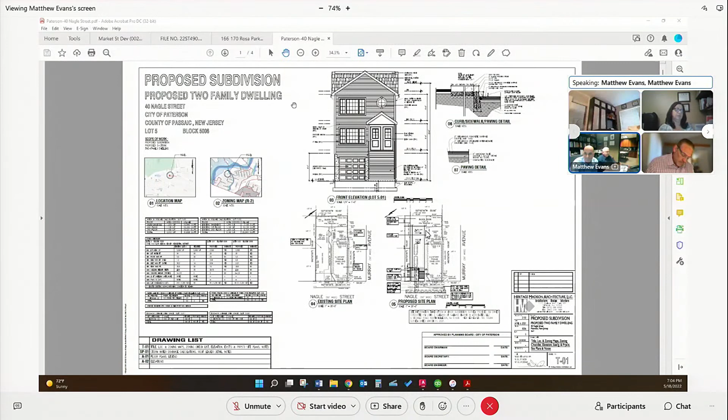Okay? Raise your right hand. Do you swear or affirm the testimony you're about to give is the truth, the whole truth, and nothing but the truth? Yes, I do. Say your full name for the record. Matthew Evans, architect planner, 470 Chamberlain Ave, Paterson, New Jersey. Thank you. We accept him as an expert witness. Please proceed. Thank you very much. Mr. Evans will post the Heritage Architecture site plan, which also incorporates the subdivision.

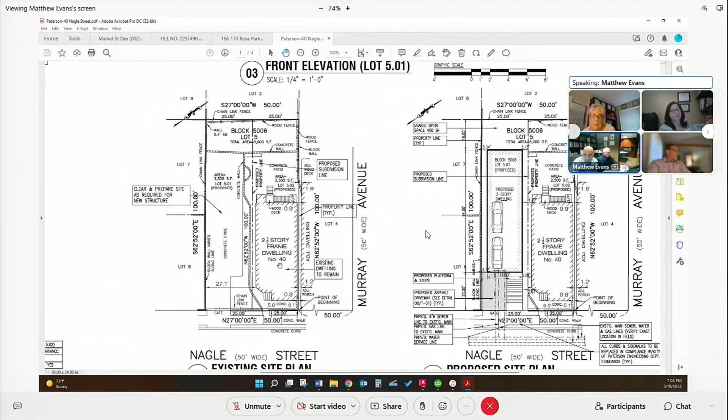Okay, so first we'll look at the existing site plan. It's a 50 by 100 lot, very standard throughout the city. We have an existing 2.5-story frame dwelling on the right side, or the north side, of the lot, and then we have basically a vacant area which is impervious and has a mix of walls and concrete and some parking there.

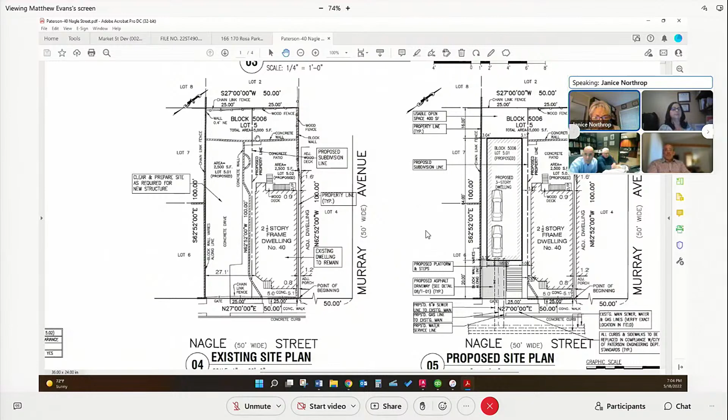What we're proposing is... I'm sorry, Mr. Evans, can you enlarge that a little bit? Is that better? A little bit more, if you could. Let me see what I can do. If you can't, just do what you can. I'll zoom in and I'll move around. There you go. Got it.

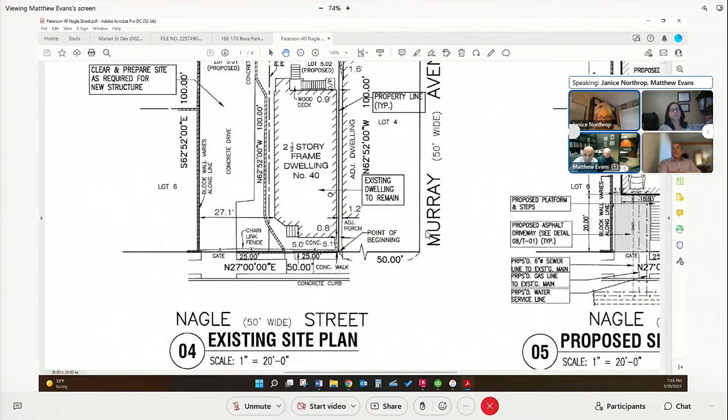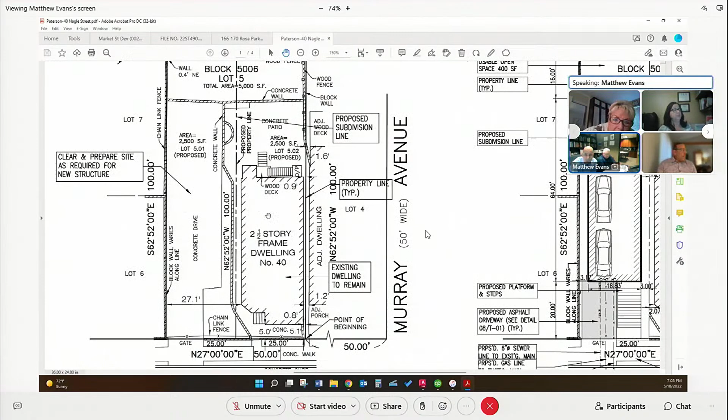Okay. Here you can see the existing site plan, Nagle Street, and we have a 50 by 100, and we're proposing to subdivide that into two 2,500 square foot parcels. These parcel sizes are consistent with the neighborhood and with the R2 zone, and they are scattered throughout this Stony Road section of Paterson and other areas. And as you can see, the existing house was built on the 2,500 parcel to the north, leaving the other one for future development, consistent with many of these buildings throughout the city.

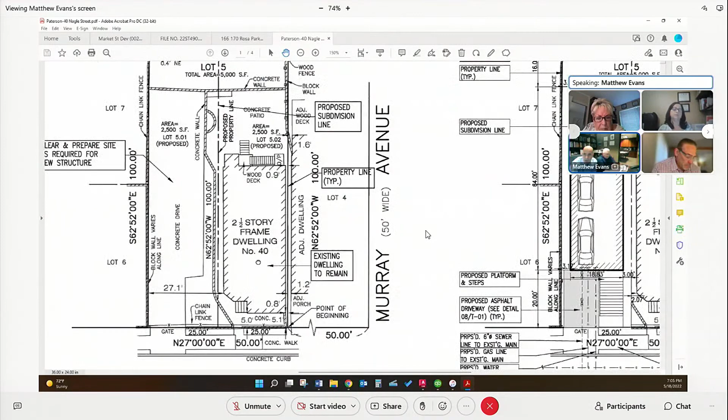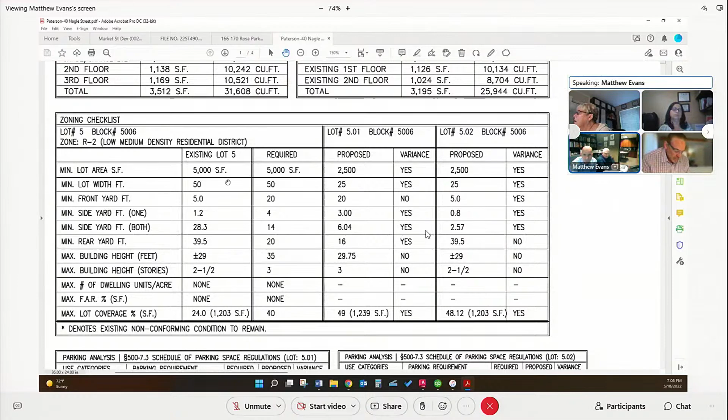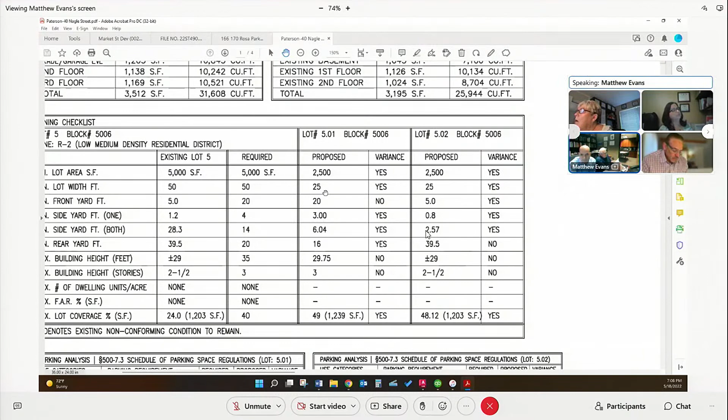So that is how we are proposing the subdivision. Going to the criteria, 5,000 square feet is required, and 50 feet of frontage is required, and we would be proposing 2,500 and 25 for each of those parcels. As far as the subdivision of the property, those would be the biggest variances that we would see.

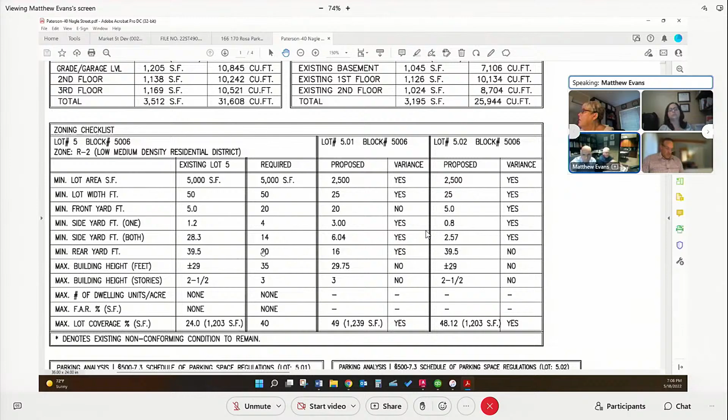The only variances, I guess, for as far as the subdivision. Right, and there's no change to the existing house, is that right? Correct. Right, okay. So you can, if you wish, proceed with any other highlights on the zoning chart. Okay, so that's basically what would be on the subdivision part of it.

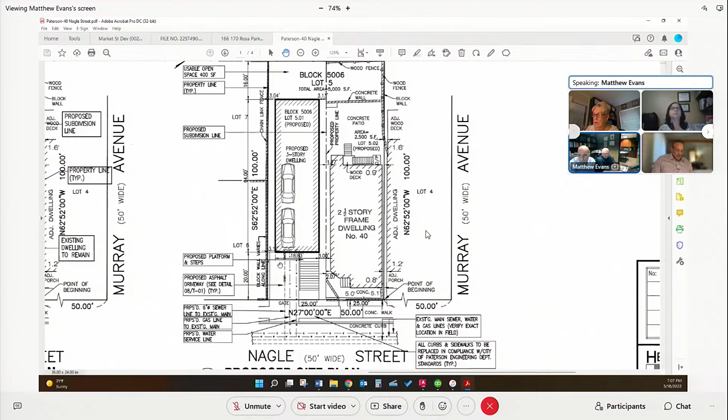Right. And then going to the site plan, we have a proposed 3-story dwelling with 2-car stack parking, and also circulation for vehicles getting in and out in the front of the property. We have a 20-foot setback consistent with the R2 zone, and then we have 16 feet setback in the rear. It's a little shy of 20 feet, but we do provide 400 square feet of open space.

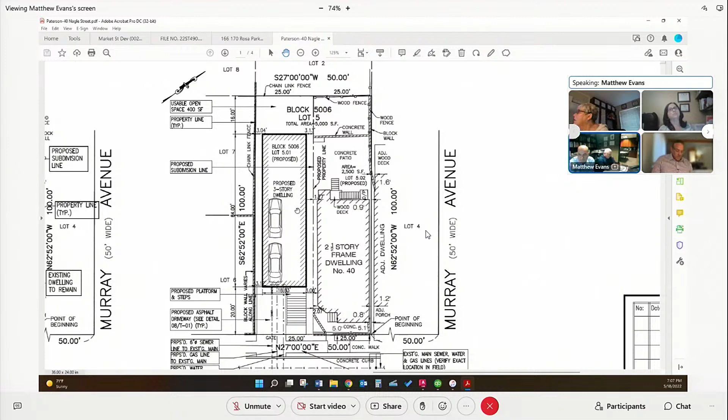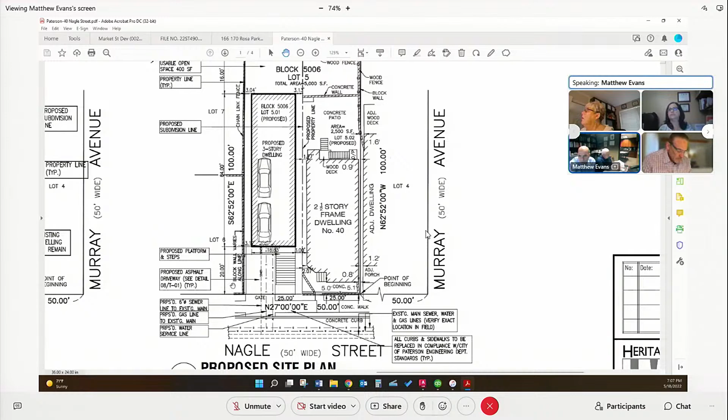The other thing is 3.13 on the north side, 3.04 on the south side of the building, and that would be consistent with many of these 2-family homes that have been proposed with the 2,500 square foot parcel. The curb cut would be to the south, consistent with the existing curb cut, but there would be all new curbs, sidewalks, and site improvements for proposed lot 5.01. Lot 5 would remain.

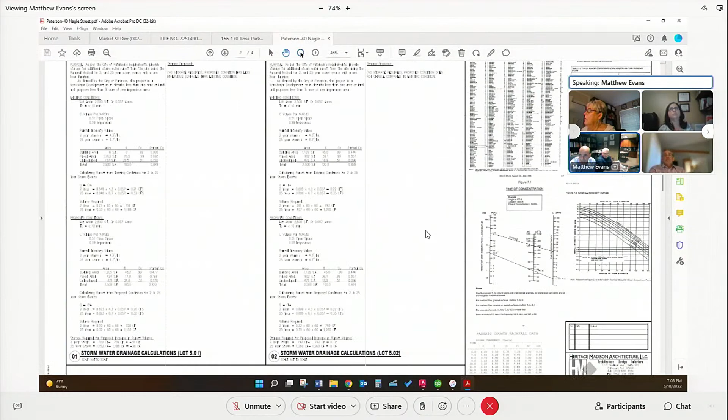Then going to the second page is basically drainage calculations and some engineering requirements. And then we have A1, which shows the floor plan, the ground floor, second floor, and third floor. Mr. Deutsch elaborated somewhat on the layout of these units and the floor plans.

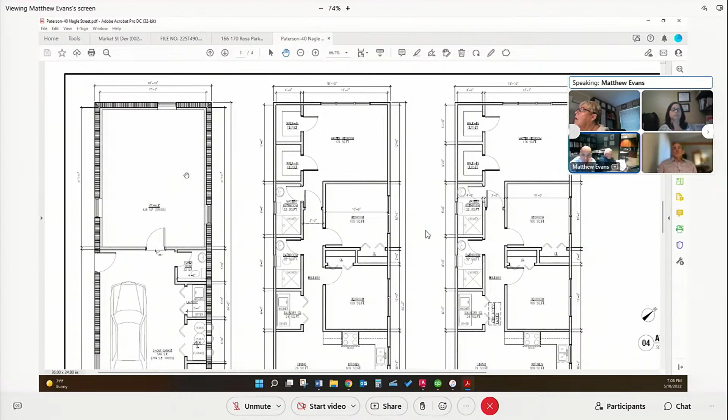And I would agree with Mr. Deutsch, we could divide that storage area so both tenants would have the ability to have storage on the ground floor level. So if this were to be approved, we would make an amended plan dividing that, basically 436 square feet would be 218 square feet of storage for each of the units.

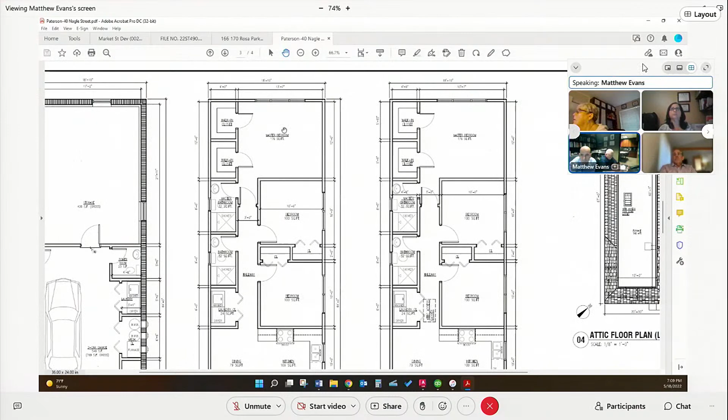The ground floor has the 2-car parking, powder room in the garage, and then laundry facilities, mechanical. And then there's a stair that accesses directly to the second floor unit. Second floor unit is 1,138 square feet. It meets the 1,100 square feet minimum for a 3-bedroom. It has 2 full baths. The master bedroom has 2 large walk-in closets.

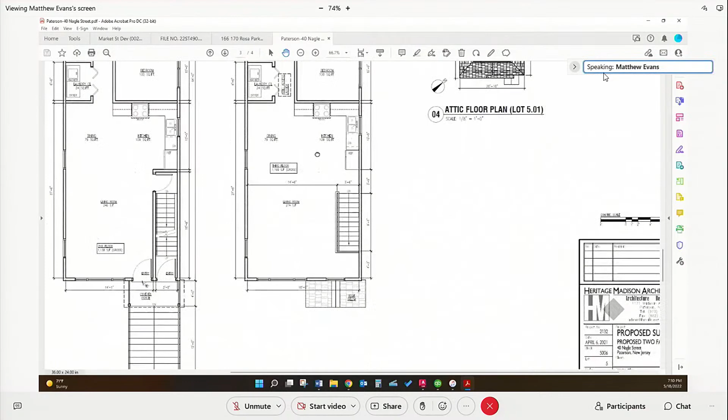And then we have 200 square foot bedrooms in addition to the main bedroom. We have a nice open floor plan for the living space, living, dining, and kitchen. That's all open living. And then there is another washer, dryer on that level. And then we have the top unit, and that unit is 1,169 square feet, and that shows a nice open floor plan with an open stairwell, consistent with the other one, a little bit more open than the lower unit. And then the rear is basically consistent with the other plan.

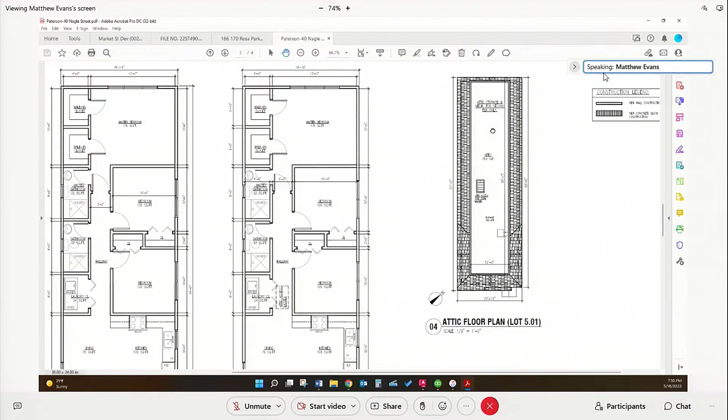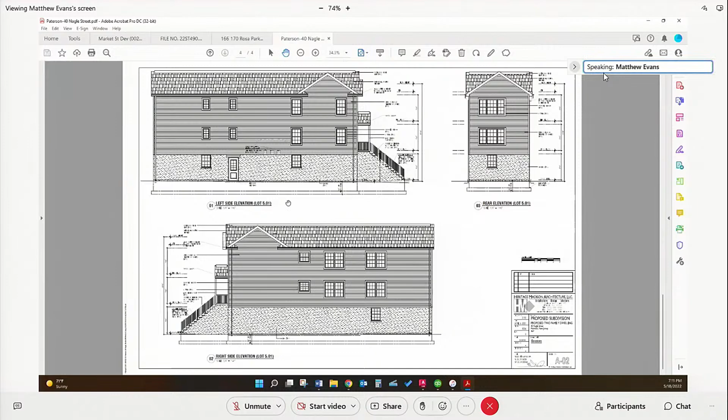Then there's a small attic plan which shows it's going to be just an unfinished plywood deck and a drop down stair that would access that for maintenance for the furnace and maybe some seasonal storage above. Looking at the last sheet, which is the elevations, we have the remainder of the elevations. We have the left side, the right side showing the stair going up to the main level to enter both apartments. And then we have siding, shingles, different materials to break up the side that way.

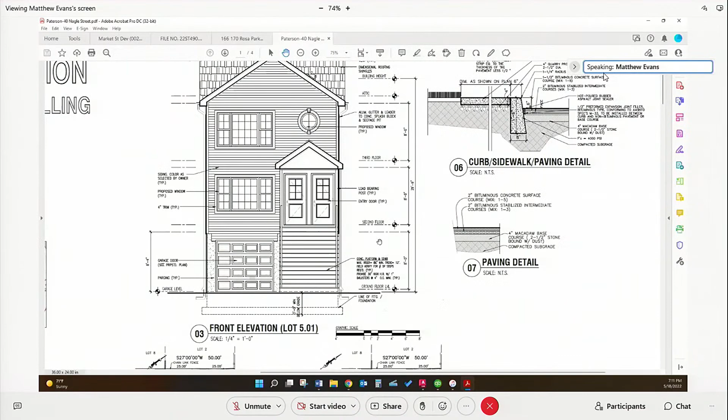So looking at the front page again, going to the front, we have a nice wide entry stair that enters to both apartments. And then there's a canopy over that protecting it with architectural windows and has a nice detail with a reverse gable on the roof, giving some aesthetic curb appeal. So that's basically the structure and the site plan.

Okay, Mr. Evans, just to follow up, Mr. Deutsch alluded to the fact that we are providing some very substantial open space area, even though it's not a requirement in the R2 for this type of development. Correct. So, again, both lots are going to be afforded either 400 or 984 square feet of open space, which provides the residents with that access for air and light, so to speak. Yeah, correct? Passive recreation in the back.

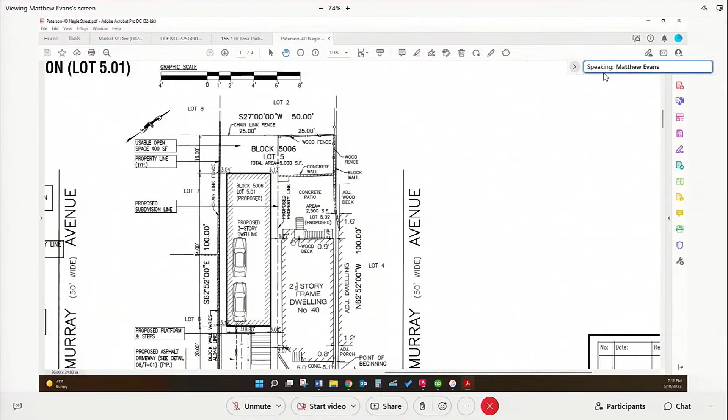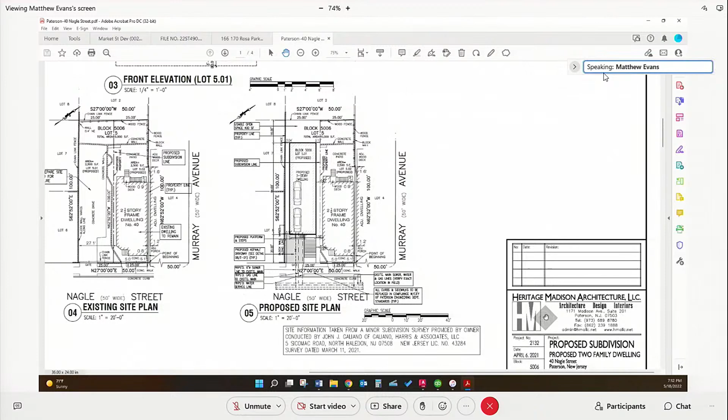Great. Okay, and you again alluded to the condition that Mr. Deutsch talked about earlier. You did an analysis, I know, of the overview of the site, which is part of Mr. Deutsch's report as well. He talked about the fact that this area is predominantly older 2.5 story, some 2, some 3 family residential dwellings, perhaps? Yes. Okay. He indicated also that some of the residential dwellings provide off-street parking, some do not.

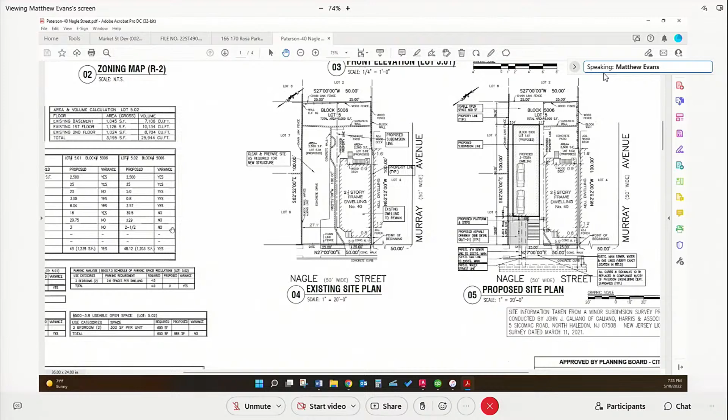Is that right? Correct. And he also pointed out that there is substantial on-street parking along Nagle Street as well. Right, like to the south of our property, there's a house that faces the next street, so basically there's no curb cuts or anything about 100 feet up to the south, so that is all open curbside parking. So there's a lot of on-street parking available, consistent with some of those large houses that face opposite streets. So it has the ability to park Nagle Street pretty well.

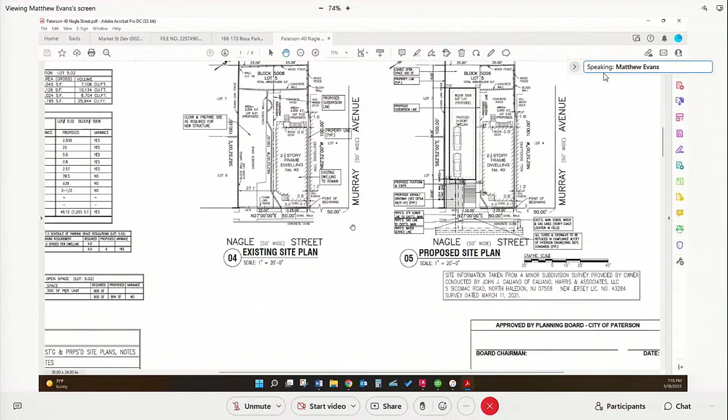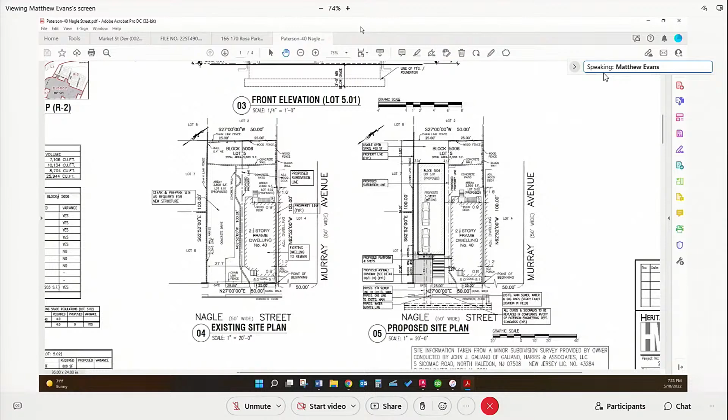In addition to the open space that we talked about, we're very close across the street to Pennington Park, is that right, for recreation? Yeah, so you cross McBride Avenue and Murray, it's right there, on the other side of McBride. And of course, there is also a bus route on McBride Avenue. Yes. Okay, that's all I have, Madam Chair, at this time for Mr. Evans. Okay, and you said you have the applicant?

Yes, I do have Mr. Acevedo to confirm. Okay, let's swear Mr. Acevedo in, and then I'll open it up to the public, please. Where is he? That's what I'm trying to see. Good evening. I see his name, but I don't see him. Bernard, is your camera on? There you go. Not yet. Your camera. Okay, there we go, I see him now, good.

Please swear him in. Please raise your right hand. Do you swear or affirm the testimony you're about to give is the truth, the whole truth, and nothing but the truth? Yes. Please state your full name for the record. Bernardo Acevedo. Thank you. Good evening, Bernard. You are in fact the principal of NJ Real Estate Asset Holding LLC, is that right? Yes. And as that entity is the owner of the property now, we're also amending our application to reflect that name designation, correct? Correct. And you've had an opportunity to hear Mr. Deutsch's report, as well as Mr. Evans' testimony on your behalf? I did.

And are you in full agreement? Absolutely, yes. And you understand the conditions that we discussed with the planning staff through his report regarding the division of the storage area to be shared by the tenants? Yes. You're in agreement to that? Okay. And any other modifications contained in Mr. Deutsch's report or the board's recommendations, if there is to be a motion for approval, you understand those would be binding upon you? Yes. You are obviously a Patersonian. You have developed and you manage real estate in Paterson. I have. You have some experience in building small two-families as well. Yes. That's all I have, Madam Chair.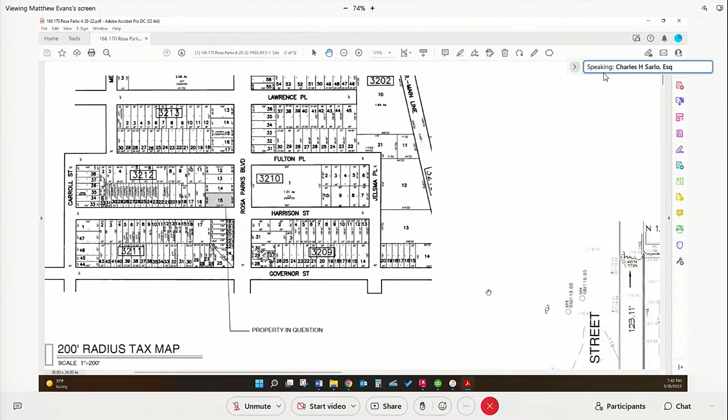Mr. Evans, just to lay a foundation, the drawings that you're about to show to the commissioners up on your screen, these drawings were prepared either by yourself or under your direction? Yes. Okay, and you're familiar with the site? Yes. Okay, you may proceed.

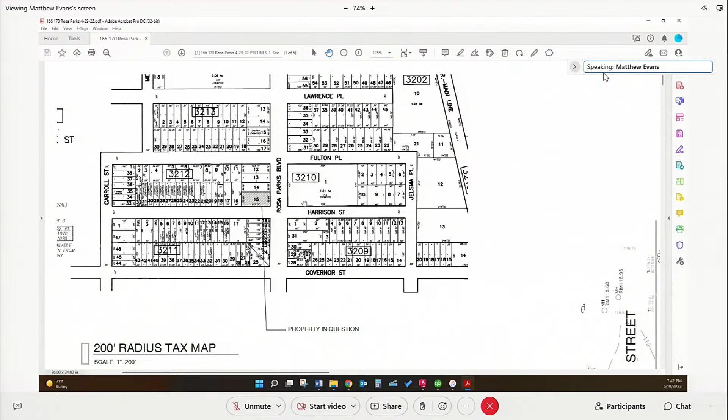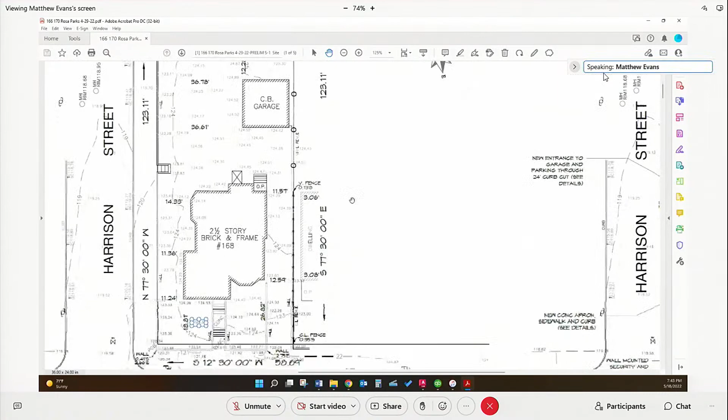Okay, so we have the first sheet, sheet S1. We have updated that, and going to the tax map, we show the site in question on Rosa Parks between Harrison and Fulton, and the properties in the RA2 zone. It's a little bit different size than some of the other properties. It's 58.69 by 123.11, so it's a little bit different than your standard 50 or 75 foot lots by 100. But that affords us, as I'm going to explain, more ability to park on the property and access around the site.

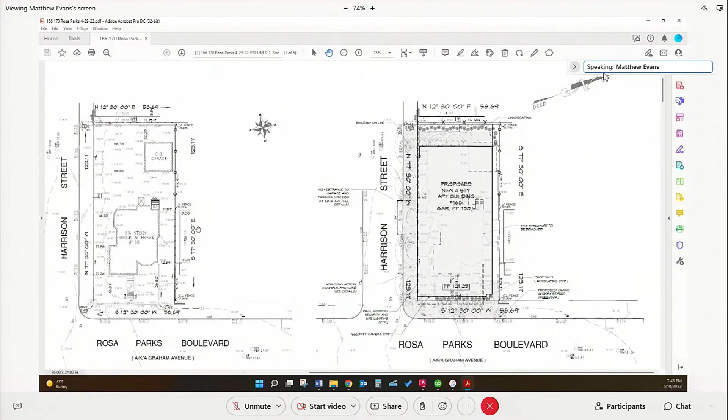So the existing conditions plan we show from the survey, which was done in 2019, shows this 2.5-story brick and frame dwelling with a garage in the back, and basically it's a corner lot. What we would be doing is removing those improvements and providing a new 4-story apartment with a garage below and a couple parking spots in the rear. We have perimeter landscaping, perimeter lighting and security around the property.

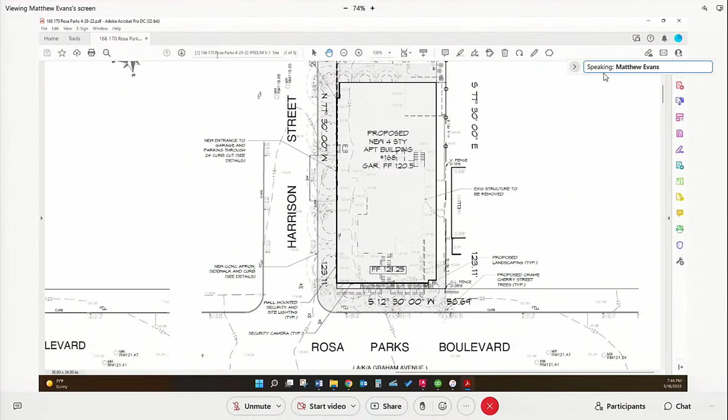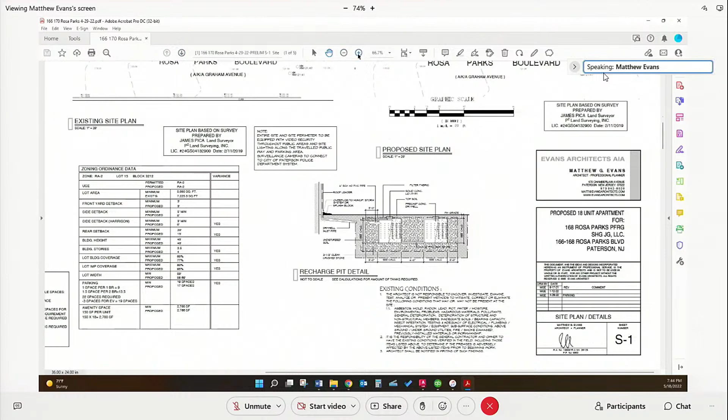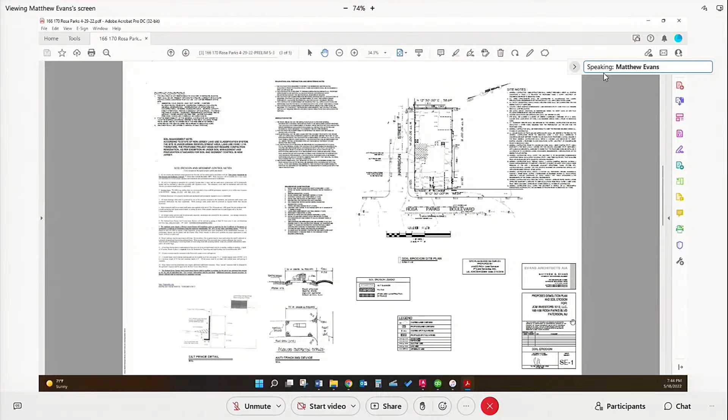Going to the zoning table, we're looking for a few variances on this. As I mentioned, the lot is a little irregular, so we designed this suited just for this site. It's not a cookie cutter kind of development; it's a custom building for this particular site. Going to the next sheet, we show standard engineering details and the soil erosion plan for approval by the city engineer and HEP. And then we go to the layouts on the floor plan.

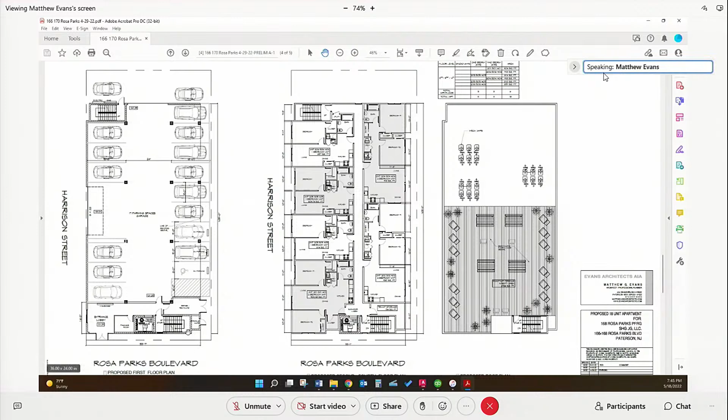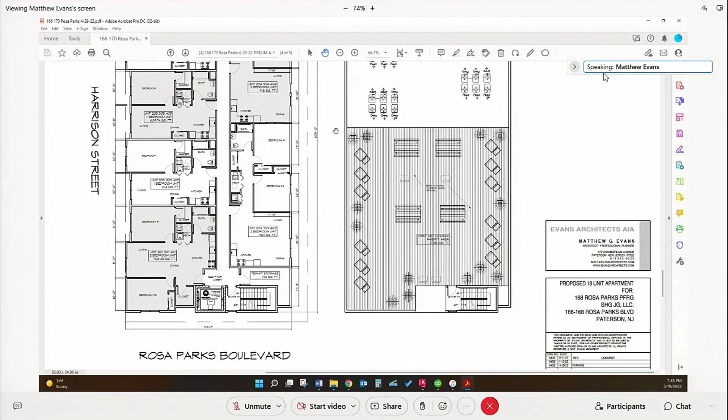Looking at the ground floor level, we have access off of Harrison Street with a 2-way overhead garage door. We have parking for the tenants underneath the building, and then 2 exterior parking spaces. We have 2 sets of fire stairs, one in the rear, one in the front. We have the main entrance lobby at the intersection of Rosa Parks and Harrison with a package room and mailboxes. Then we have our refuse and recycling room, which is behind the sprinkler water room. A hallway gives tenants access from the garage directly into the apartment building.

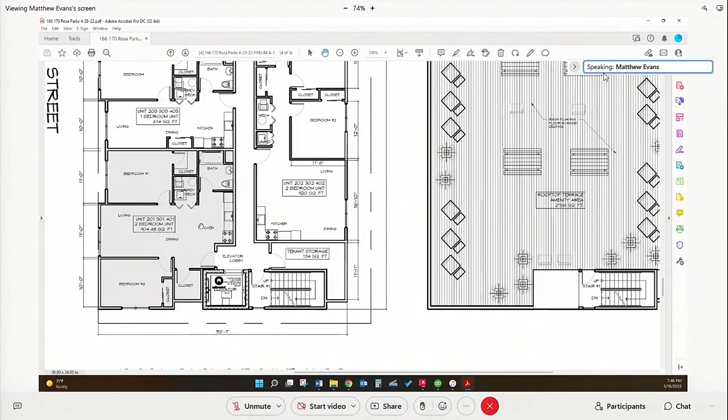Going up to the 2nd through 4th floor plans, they're all the same layout. It's more efficient. Going from the front, we have unit 201, a large 2-bedroom unit, and we break up the facade to give it more aesthetic appeal, which creates a more dynamic floor plan layout. Units 201, 301, and 401 all have their own independent central air and heating systems, operated and controlled by each tenant. They all have laundry facilities, large walk-in closets, large living, dining, and open kitchen design.

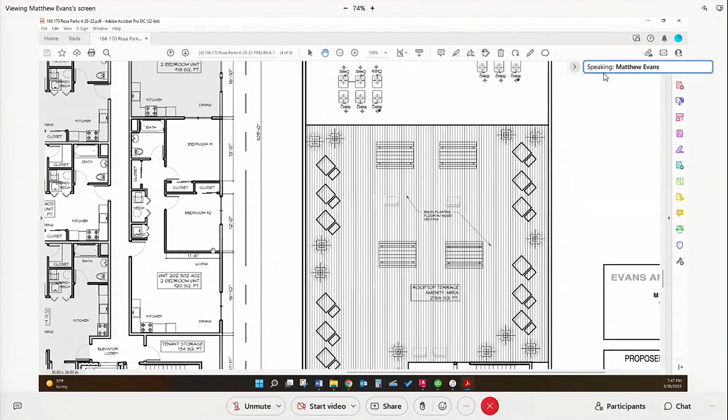Then we have a 2-bedroom for units 202, 302, 402, consistent with what I explained on the other one: a large open kitchen and dining room, large bedrooms, and large handicap accessible bathrooms, and all these units will be handicap accessible. Unit 203 is a 1-bedroom with large bedrooms, walk-in closets, and an open floor plan for the living space. Unit 204 is a 2-bedroom, similar to 202, with that large open plan. It's 918 square feet.

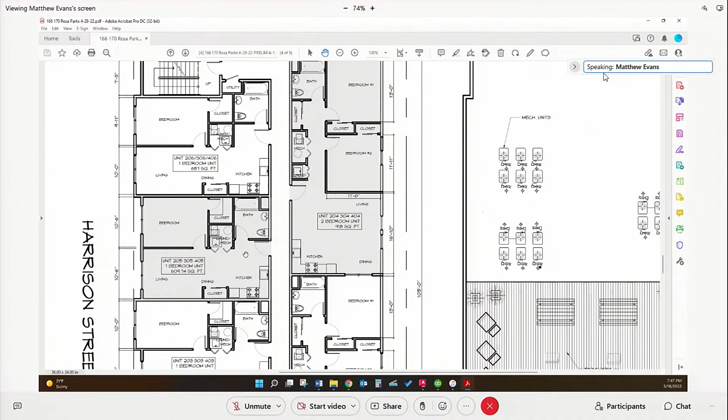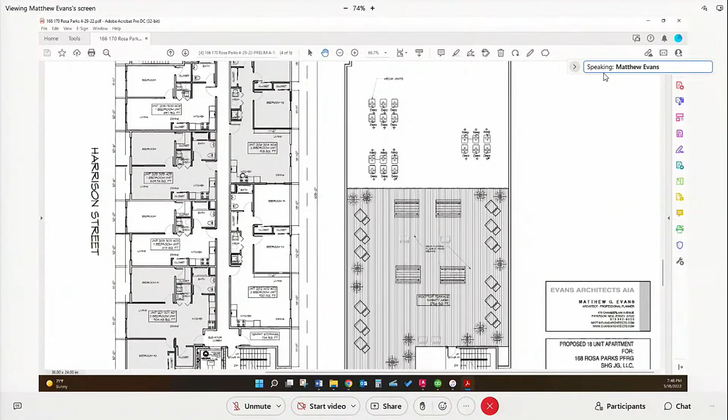Unit 205 to 405 is a 1-bedroom, same consistent design, independent mechanicals, laundry facilities, handicap accessible unit, an open floor plan. Going to unit 206 to 406, we have another 1-bedroom unit, basically similar to unit 205. So all those units meet the minimum criteria for the ordinance for unit size.

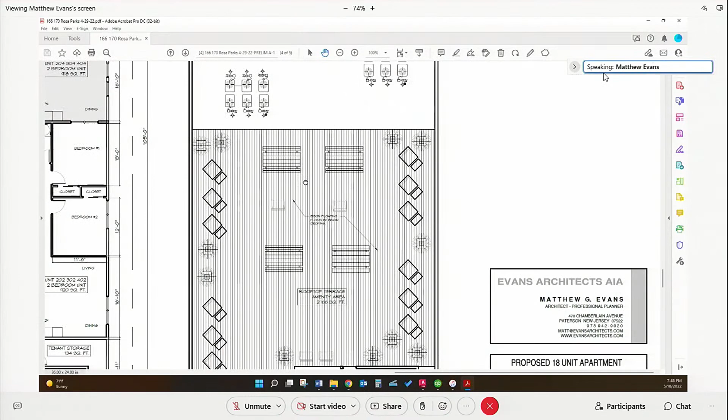And then we have passive recreation space on the roof, which would be accessed by the stair, and it's 2,766 square feet. For the tenants, as I mentioned, passive recreation would be a decking, and that would be just for the tenants to use for quiet enjoyment of the space. Then the rear section we show on the roof, which has mechanical units.

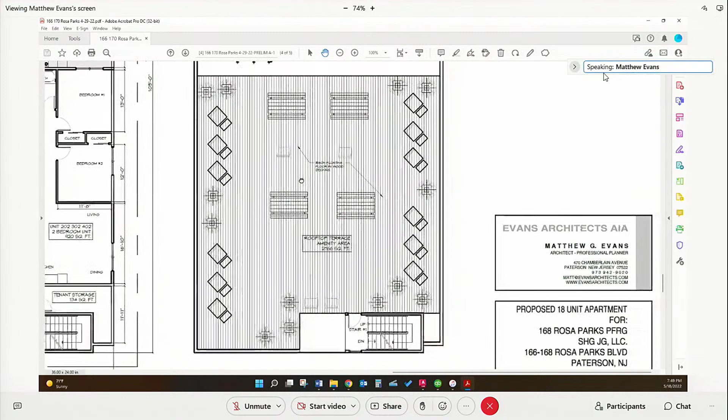All the perimeter of that roof would have a 4-foot wall, which would protect the tenants, and it's a little higher than is required by code, but we want to be extra safe on that and have that safety factor installed. Going to the elevations, we show the Rosa Parks elevation,

and as you can see, we have a mix of materials, and I broke up the facade, and also you can see how large those windows are. We have a lot of light and air in these units, so we have large windows, and also you can see we have 9-foot ceilings on all these floors, which gives a nice volume and creates a better living experience.

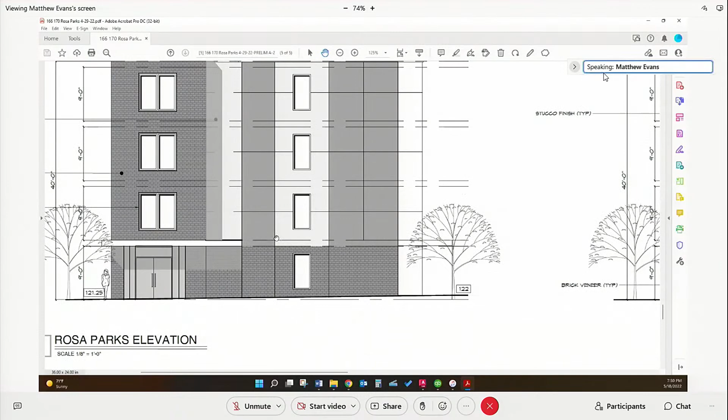And we have on the first floor, the main entry is basically at the intersection of Harrison and Rosa Parks, with a nice glass storefront entry, the canopy over that. And as I mentioned, different materials. We have brick, different stuccos and copings to give it more dynamic curb appeal. And I'll go to the left side elevation, which is on Harrison.

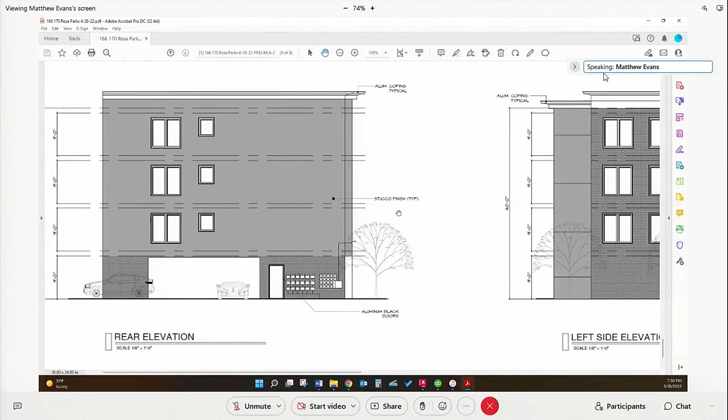We have the garage entry, brick, mix of stucco, cornices broken up vertically and horizontally, with stepping back of the facade to give it more of a dynamic character, so it doesn't become this boxy looking building. You can see the rear elevation with the parking, and then we also show the utility connections to the back, and that would be for electric and gas meters. So that's hidden from the street.

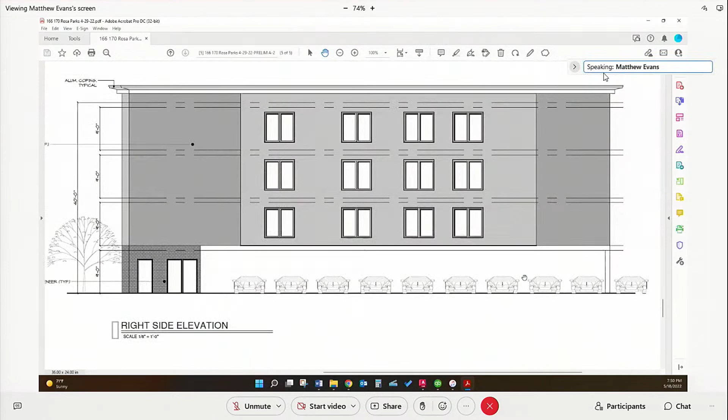And then looking at the right side elevation, we have open parking below, and then we have refuse access, and access to the first floor. And as I mentioned, we have nice large open casement windows for all the living and bedrooms. So that's basically what we're proposing on this subject property.

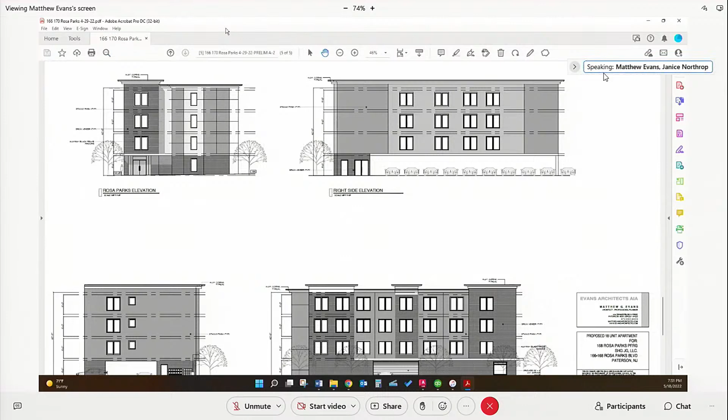Okay, thank you, Mr. Evans. That would conclude your testimony? Yes. Okay. So at this time, let's call, is it Mr. Ricci, who's the planner? That's correct. All right, let's call him, swear him in. Do you swear or affirm the testimony you're about to give is the truth, the whole truth, and nothing but the truth? Yes, I do. Can you please state your full name for the record? TJ Ricci, last name is spelled R-I-C-C-I, address is 92 Park Ave, Rutherford, New Jersey. Is your name Thomas? Give me your full name. Yes, Thomas.

Can you state your credentials, please, for the record? Yeah, sure. So I have a Bachelor of Arts degree from Rutgers University. I also have a master's degree, also from Rutgers University, in City and Regional Planning. I'm a licensed professional planner in the state of New Jersey. I'm also a member of the American Institute of Certified Planners. I have approximately 4 years of experience in the field of professional planning. I've been accepted by over 20 boards throughout the state of New Jersey. Okay, thank you. We accept him as an expert witness. Thank you, Mr. Ricci. You may proceed with your testimony.

All right, so for the benefit of the board and my testimony, I'm just going to share my screen, and I believe that we need to mark this exhibit. Let me know when we can see the screen. Okay, we can mark that as A1. Mr. Ricci, what would you call this document? So this is a simple aerial exhibit showing the site as well as the surrounding neighborhood. It's a 2-sheet exhibit. Okay, so Madam Court Reporter, this will be Exhibit A1, 2-sheet exhibit showing the subject property and surrounding area.

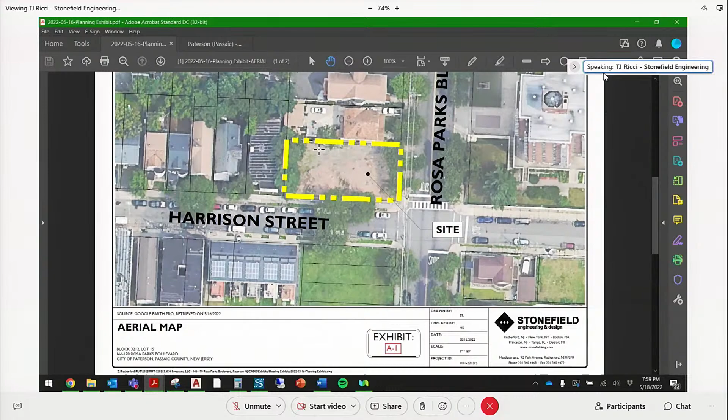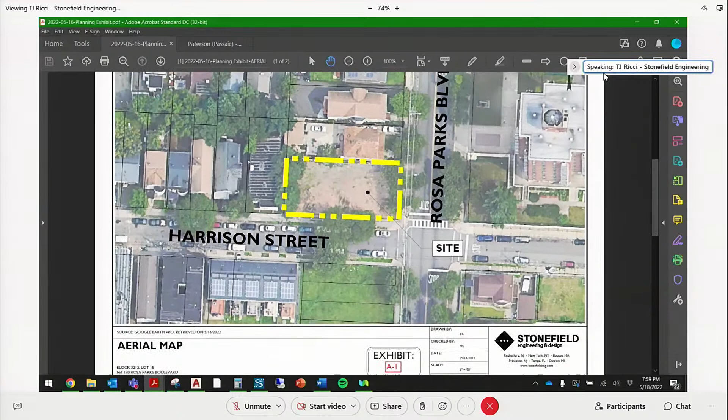Additionally, if you look around, a lot of the adjacent uses have either parking in the rear or they have driveways alongside. The housing complex across Rosa Parks has their own lot behind the building. Some townhome developments across Harrison Street do have their own garage. So it's not as if there's no off-street or on-site parking for the adjacent uses. So there is a lot of parking that is being supplied on-site for the adjacent uses. And like I said, we're only 2 spaces deficient. We almost meet the required parking.

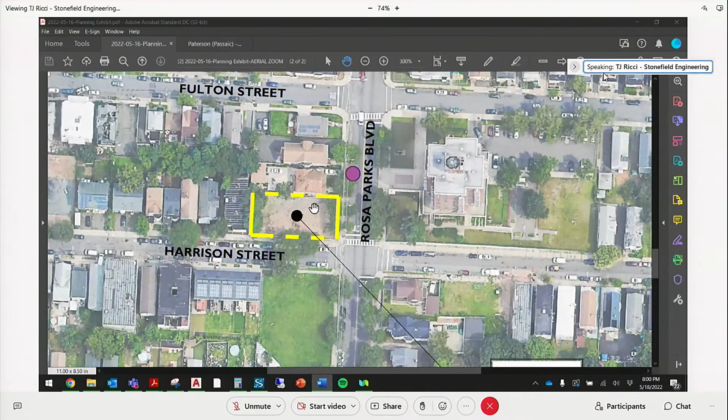If we flip to sheet 2, there are a couple bus stops conveniently located actually right outside the entrance of the proposed building on Rosa Parks Boulevard. So there is access to NJ Transit bus service in the area.

And then lastly, there is a variance required for the parking setback on the northern property line. 3 feet is required and 0 feet is proposed. This design-wise is a result of the limited amount of space. The way that the parking is laid out, you have a drive aisle in the middle and then parking on both sides of the property. We really need to utilize most of the lot for parking.

The advantage, the good thing is that the nearby house does have some fencing up in the rear. Additionally, they do sit a little bit higher than our site, and the design of that dwelling is you kind of walk up a set of stairs on the porch to the first floor. So there is a little bit more of a vertical separation. The parking is located on the ground, and then the windows of the first floor are located approximately half a story higher than, say, our ground floor parking level.

So in addition to those justifications, the project as a whole carries out a couple purposes of the Municipal Land Use Law. Purpose A, which is promote public health, safety, morals, and welfare. Safety is promoted by, like Mr. Evans mentioned, there's going to be security lighting, there's going to be security video installed surrounding the property. General welfare is promoted by the project addressing the need for more housing in Paterson, which is something that's mentioned in the master plan and redevelopment plan.

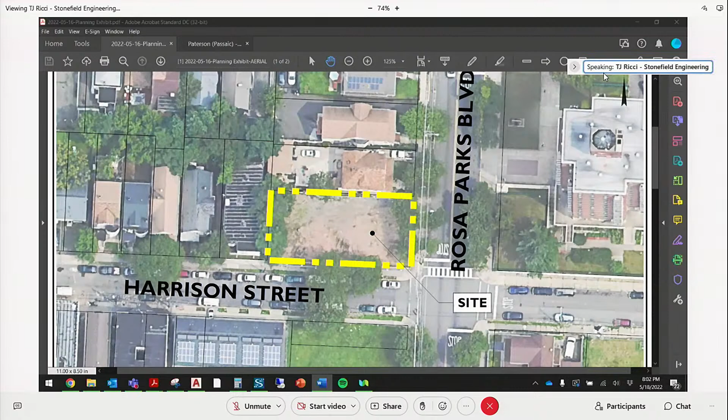So in addition to that, I think we're very in line with the Fourth Ward redevelopment plan. A couple of the goals are revitalize the Fourth Ward and improve the quality of life for residents. I think that this project addresses that goal by providing access to new high-quality housing units. And then it also makes mention to assemble parcels for larger development projects and to identify larger properties and provide opportunities for more substantial redevelopment projects.

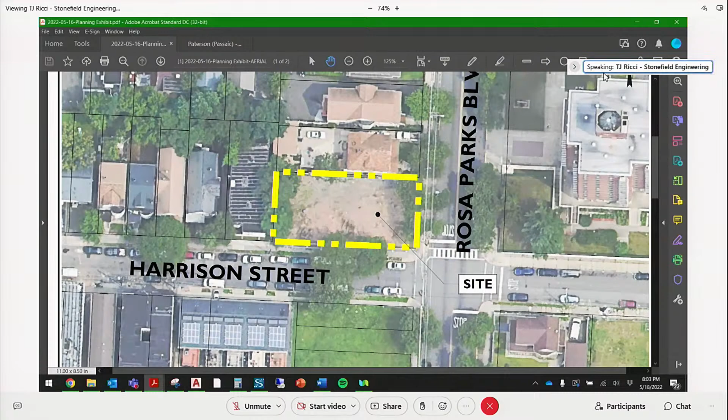I think we kind of hit the nail on the head with this project. This is one of those kind of unique parcels that's like, okay, we have 2 families, 4 families, 6 families in the area, but you could tell this is a lot more substantially sized. It's perfectly slated for a mid-sized apartment building with the parking underneath. And then we do want to, like I said, eliminate undeveloped properties as they typically contribute to more blight. So I think the applicant has proposed a really nice development for this site, and it really fits in with the surrounding neighborhood.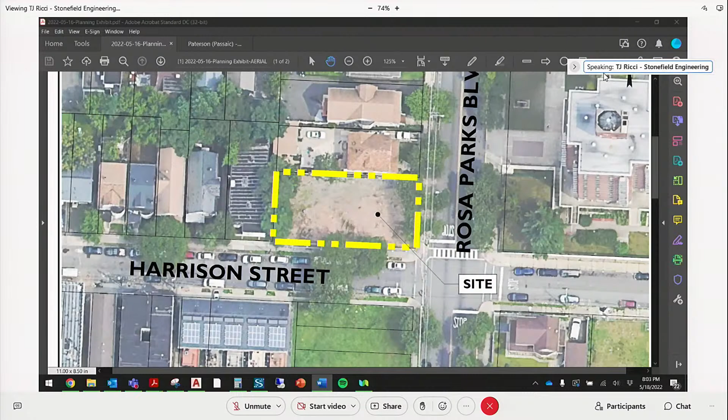So that being said, I think that these variances, although we are seeking quite a few, are pretty minor in nature. I think the massing, the building, and the use is for the most part compliant, and we meet or exceed a lot of the other requirements. I think we fit in within the surrounding neighborhood. I think there's going to be a lot of positives for this project, specifically providing new high-quality housing units to residents and potential residents of Paterson.

And in my professional opinion as a planner, I think that these variances can be granted under what we call the C2 balancing act, or the C2 benefits versus detriments, meaning all the positives of this project outweigh any substantial detriments to the surrounding community.

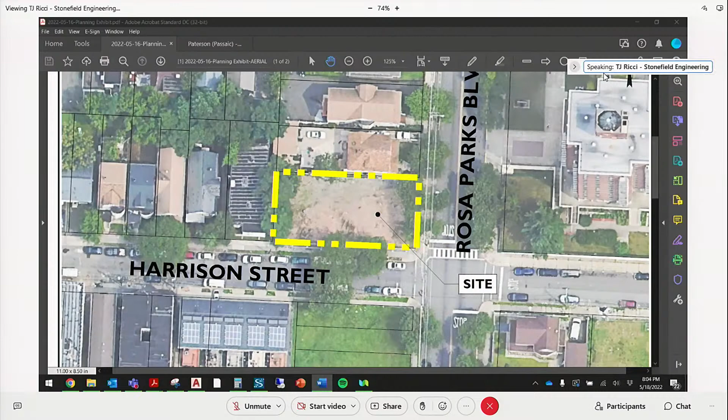So I think that these variances in this project can be approved. That concludes my direct, but I'm happy to answer any planning or zoning related questions regarding my testimony. Thanks. Thank you, Mr. Ricci. Okay, I'm not gonna call Mr. Anderson yet because I'm not sure if he's needed; we will call him in the end and swear him in. I know he's available, he always is, so that's a good thing.

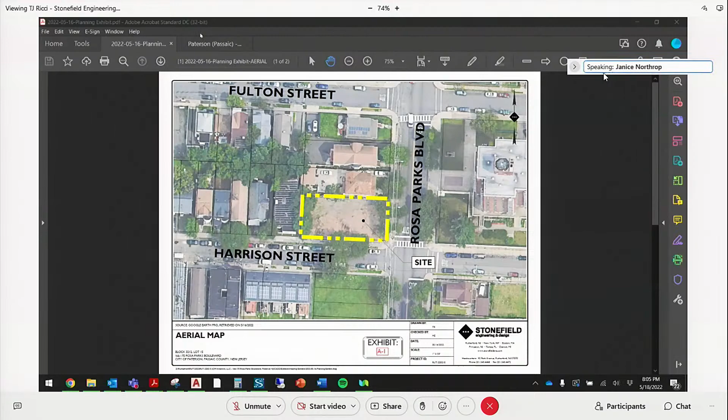All right, so at this time, I'd like to open it up. Just bear with me. I'd like to open it up to the public, and I'm gonna ask them to please call in if you have any questions on 973-321-1579. The meeting ID is 711-680-001. I am going to allow 2 minutes for those people to call in, and I'm gonna allow 3 minutes for questions on this application, okay?

So, Madam Secretary, I believe you told me we have someone on the line here. Yes, we do. Her name is Wendella Canty. Mrs. Canty, do you hear me, ma'am? Can you unmute yourself? Hit *6 on your phone. Miss Canty, *6 will unmute you. Okay, I unmuted. We can hear you. Please state your name and address for the record. Wendella Canty, 164 Rosa Parks Boulevard, Paterson. Okay, your question, please?

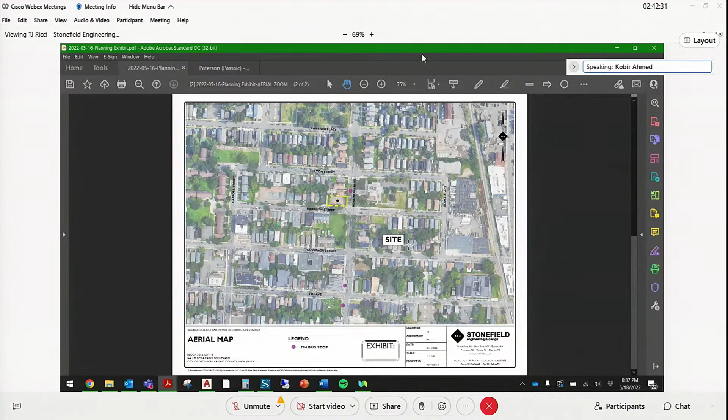If they have one building like this, they are doing it as an example. Okay, we have on this block, 100 feet away, this building, so we're gonna build another one. And then they go to the next block and say, okay, we have this 5, 10-story building, so why not build a bigger building than this, or the same size as this? So they just continue doing it, and it's not gonna stop.

I know they have more buildings, but my question is, all these buildings are bringing who? Bringing problems, bringing more people. They're not bringing the... Okay. I'm not sure that's a planning and zoning question that could be held against this applicant. I think those are different questions for different groups of people, but maybe not the planning board. I think that doesn't have to be held against the applicant in this particular application.

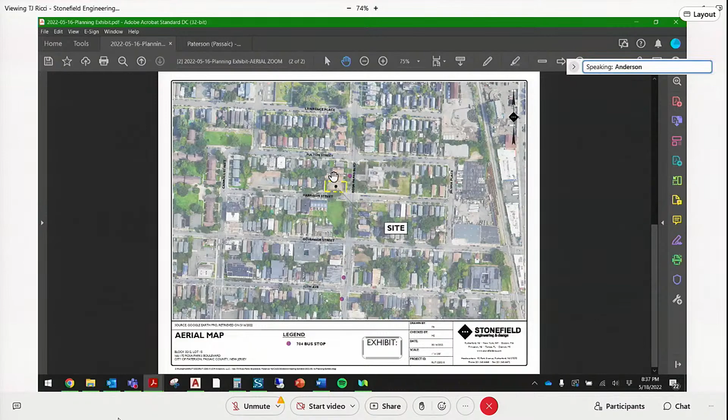Understood. Now, I feel bad that the commissioner is misinformed, because obviously he doesn't know our sites, and we don't have these types of issues at our sites. We've razed a lot of blight, a lot of vacant and abandoned properties, and we continue to do that. The only thing we're doing is answering the call of redevelopment in different areas of the city of Paterson. We don't make the zoning laws and the rules and regulations for areas. That's done by the planning board and the city council. Thank you, Madam Chair. Okay, understood.

I can see, and I think most people can see, a lot of houses mushroomed together very close to begin with, but I do see it. I'm not so sure that if one goes up, there's gonna be 5 more going up on the next block. I don't know about that. I think that remains to be seen. The lot has to be empty and the lot has to be available, and sometimes in Paterson we just don't have the lots available. But again, everybody's entitled to their own opinion. That is what we're all about.

I believe that Mr. Acevedo did explain what goes on with the redevelopment plan, and it is very costly to do that, I do know. And sometimes, like I said, I've also been an example of that. And as much as I didn't care for it, we have to move forward, life goes on, and somehow we all adjusted. But again, everyone's entitled to their own opinion. So I'm gonna move on and ask if there are any other questions of the applicant, the architect or the planner.

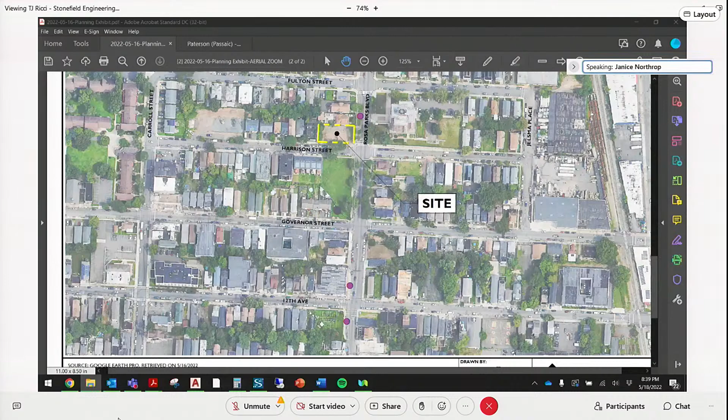All right, Mr. Ricci, you can take the site plan down, thank you. Sure. Okay, if no one else has any questions, then I'm gonna ask Mr. Sarlo to please summarize. All right, thank you, Madam Chairwoman. So the commissioners heard the testimony of Mr. Ricci and Mr. Evans. They heard the responsive comments by Mr. Reed, a representative of the developer, the property owner. And I think we all heard the comments and concerns of the one neighbor and also some of the commentary by the one commissioner. I thank the board's counsel for going through the history of what it takes to designate an area in need of redevelopment.

I know this board deals with not only applications that require variances from zoning, but also variances from an area in need of redevelopment. I think that's the importance of the differential: when you meet the intent of an area in need of redevelopment, it carries a lot of weight. As counsel said, the process is very intensive. A lot of individuals acting on behalf of the government weigh in on this plan, and the public has the opportunity to weigh in. It starts right here with this board, whether or not the commissioners on the screen were here in 2004, 2005, I think was the time frame.